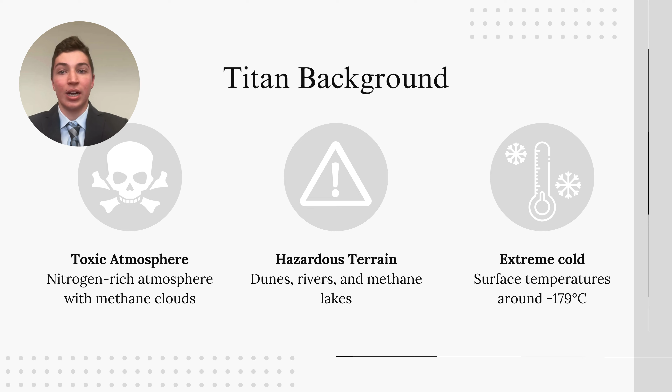We selected Titan because it is one of few celestial bodies in the solar system that has a dense enough atmosphere for an airship to fly. Titan is also a very interesting moon to explore, as even despite its toxic nitrogenous atmosphere, methane clouds, rivers, and lakes, and its extreme cold, there is still potential for life forms that use methane as a liquid solvent instead of water. Life as we know it couldn't exist, but if we were to discover life, it would revolutionize the fields of biology and astronomy, showing the potential for different life forms from all across the solar system and galaxy.

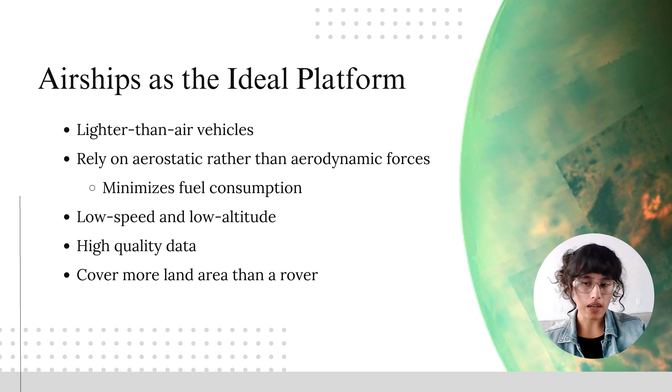As lighter than air vehicles, airships are the ideal platform for a long-term mission to Titan. They rely on aerostatic rather than aerodynamic forces, which minimizes fuel consumption. Additionally, airships offer a unique combination of low-speed, low-altitude flight, endurance, and maneuverability. Finally, airships are able to capture high-quality data while covering a large land area, enabling analysis of Titan's hydrologic cycle, methane sources, and possible origins.

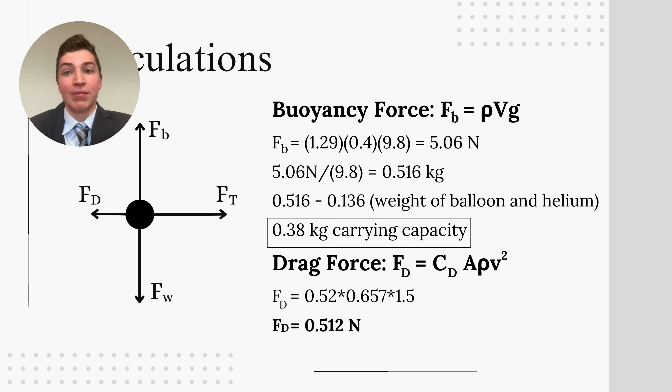Before constructing the airship, we calculated some of the forces that would be acting on it. We found that considering the weight of the balloon, the airship would have a carrying capacity of around 0.38 kilograms, assuming a perfectly spherical balloon. We also calculated the estimated drag, finding that there would be about half a newton of force opposing the thrust from our motors.

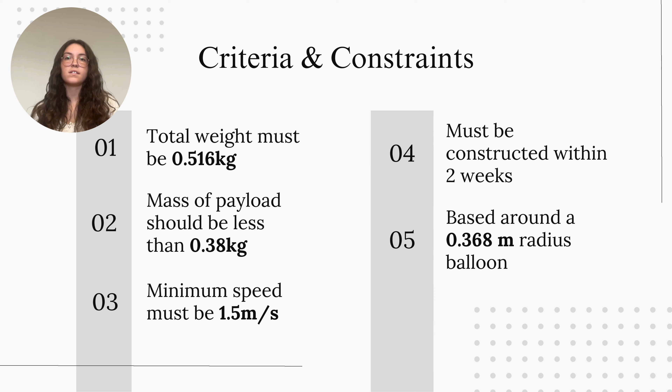Using the calculations from the previous slide, we determined that the total weight of our design had to be 0.516 kilograms, with the payload mass being less than 0.38 kilograms, and the minimum speed had to be 1.5 meters per second. The guidelines from our mentor and the program gave us 2 weeks to construct the design using a 0.368 meter radius balloon.

With the criteria and constraints in mind, we moved into the sketching phase, where each team member sketched their own design for the airship. Some of the aspects we focused on were the shape of the gondola, the number of propellers, the propeller positions, and the method used to attach the gondola to the balloon. We then came together to compare designs and narrowed it down to 4 options.

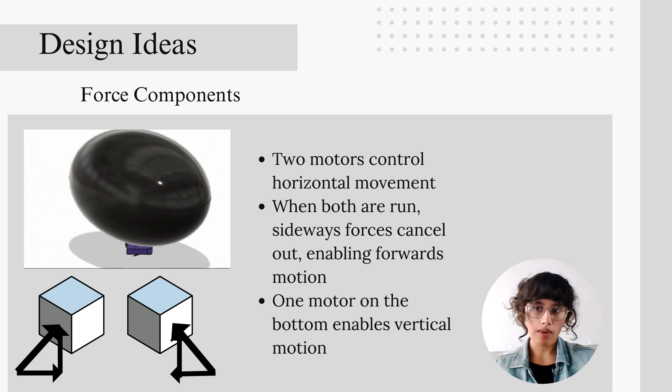Our first design idea relies on force components. Two motors enable horizontal movement. When both are run, sideways forces cancel, enabling forwards motion. To turn, only one motor needs to be run. An additional motor on the bottom of the airship enables vertical motion.

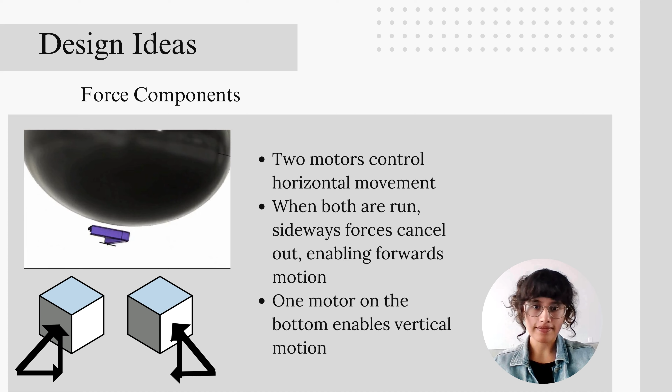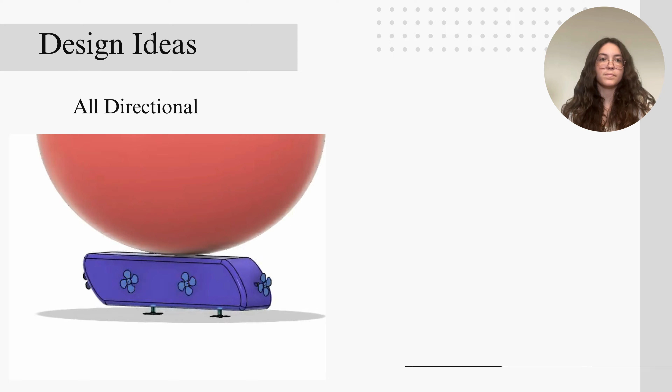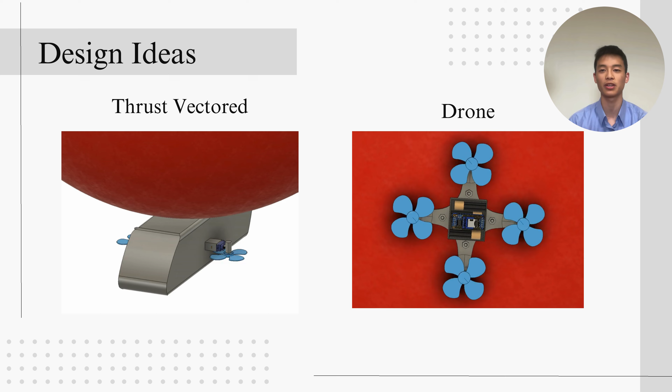Our final idea utilizes thrust vectoring. This is the most traditional approach to a gondola design out of the 4. 2 DC motors, each rotated by a positional servo, angle up and down and sideways to provide thrust. This approach would be the most simplistic because it is following traditional designs of a normal gondola.

To decide which designs we should pursue, we created a decision matrix. Each design was graded based on a set of criteria, with the lower numbers as worst and the higher numbers as best. As you can see here, for attachment mechanisms, we decided on using a net instead of a rigid exoskeleton to attach our gondola to the balloon. This was largely because of the ease of doing so.

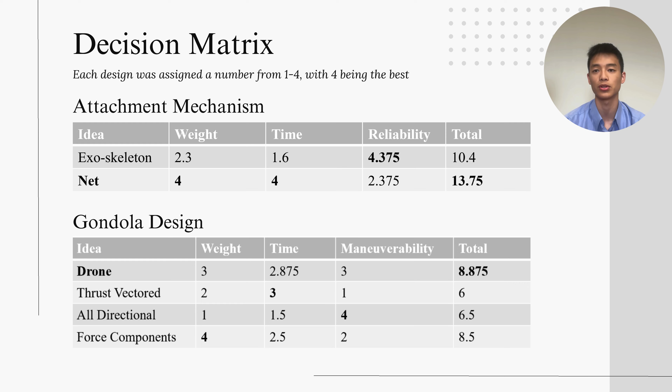For our gondola, we settled on the drone design as it was the most well-rounded and performed the best overall. Ultimately, we settled on our final design of a drone maneuvered by 4 DC motors, with the electronics placed in the center. The drone is 19 centimeters across and weighs about 29 grams once 3D printed.

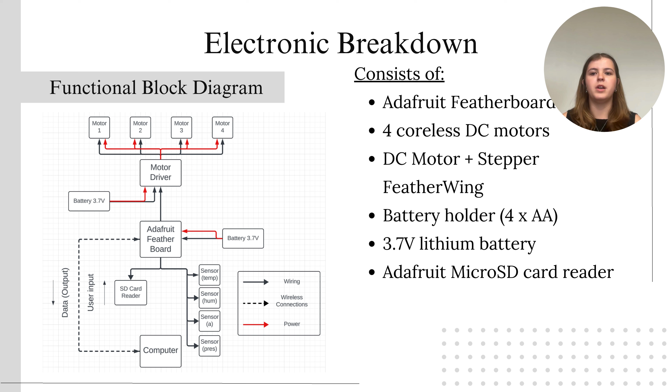For the electronic components, we chose to program an Adafruit featherboard and integrated a motor driver to control 4 DC motors. The motors were powered by 4 AA batteries, while a 3.7-volt lithium battery provided power to the featherboard itself. Attached to the featherboard was an SD card reader responsible for recording data from its onboard sensors, which included temperature, humidity, acceleration, and pressure to monitor environmental conditions. The featherboard operated wirelessly, enabling autonomous flight capabilities.

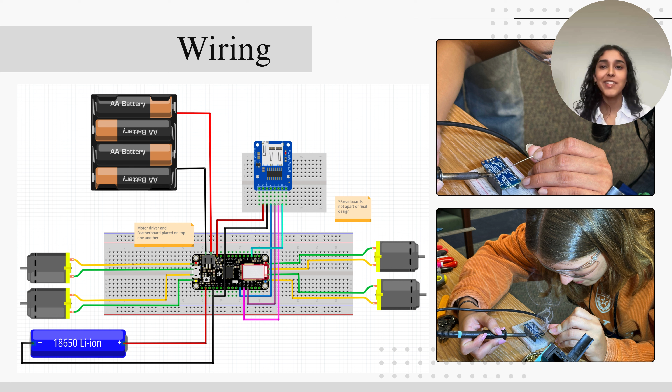Using the previously shown diagram, we modeled the optimal placement of our electronics using Fritzing. To conserve space and minimize weight in our final model, we positioned our motor driver above the featherboard, thus eliminating the need for a breadboard. Here on the right, you can see Barbara and myself soldering the header pins to the featherboard to secure it into the driver during the testing process.

In terms of programming, we utilized an Adafruit featherboard that is equipped with a USB connector, charging port, and several different sensors. With the charging port, we were able to fly our airship wirelessly while using a battery, and with the USB connector, we were able to plug the board into a laptop and run code files from the CircuitPy drive we created.

We ran and coded our programs in the CircuitPython environment called Mu, and from there, we were able to test the functions of our code, such as spinning the motors, through the Bluefruit Connect app that contained a control pad, all of which was compatible with both our featherboard and CircuitPy.

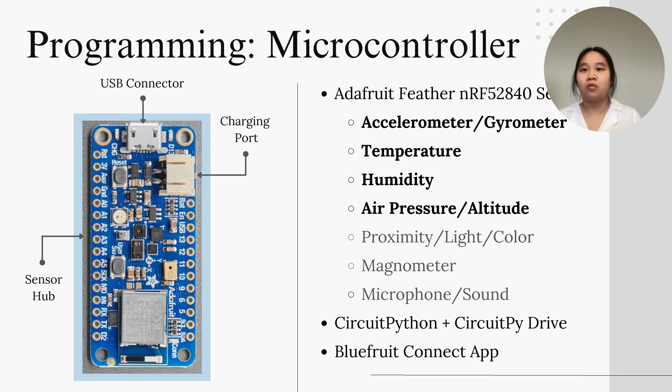At first, we had some technical challenges connecting the board to our laptop and getting some of our programs to execute. But after we were able to troubleshoot those issues, we were able to implement several features on our airship, including movement and sensors. These sensors include an accelerometer, a gyro which measures angular velocity, temperature, humidity, air pressure, altitude, proximity, sound, and more. As we tested our build in the air, all the different sensors collected data and stored it within a file on the SD card, which will be discussed in depth later.

After setting up the microcontroller, our main focus was coding the motors, done by utilizing CircuitPython and its MotorKit library. We were able to maneuver the airship vertically by switching the directions of the motors, which changed the airflow, causing the ship to push either up or down.

However, our biggest challenge was changing the direction of the ship without causing it to drift upward as well, and integrating these quadcopter flight dynamics into a neutrally buoyant airship, a concept we couldn't find much past research on. After some experimentation, we accomplished this by referencing drone dynamics, running two adjacent motors at a high speed and running the other two at a low speed, causing the ship to move in the direction of the slower motors.

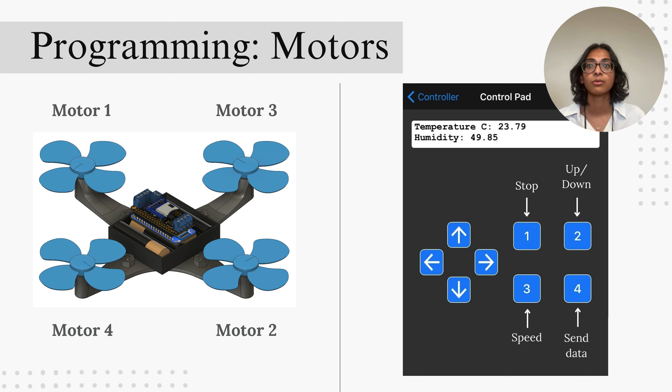Using the Bluefruit Connect app, we added a user interface to allow the ship to be maneuvered through a control pad. As you can see, the control pad included 4 directions: front, back, left, and right, and some additional controls such as stop, up and down, and 4 incremental settings for speed. One of the most important parts of the user interface is the 4th button, which allowed us to program when we wish to collect and store data.

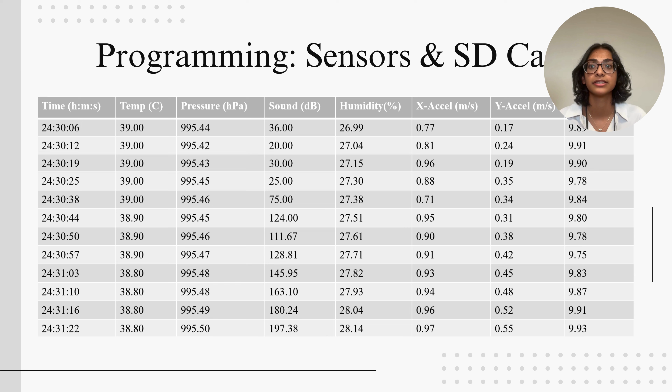By clicking the button, a stream of data is stored to an SD card, including readings for temperature, pressure, sound, humidity, and acceleration, which can be later downloaded and analyzed. This was another one of the biggest challenges we faced throughout the project, determining an efficient way to collect data. After attempting to use an MQTT protocol, we eventually settled on the SD card due to its simplicity and efficiency.

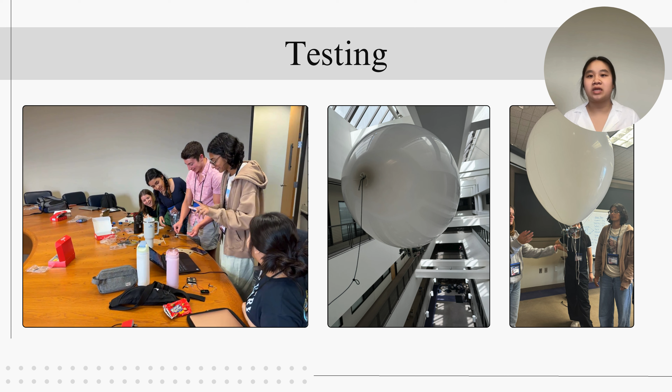We tried the net at first, but then decided against it, as it added too much mass to the airship, making it too heavy to be neutrally buoyant. We decided to use masking tape and Velcro to secure the build to the balloon. In our most recent prototype, shown in the third image, we oriented the balloon the way it normally is and found success securing the drone at the bottom with a string tied around the balloon. After deciding that design was best, we added small increments of mass to make the airship neutrally buoyant, which allowed us to continue testing and controlling its movement with the motors.

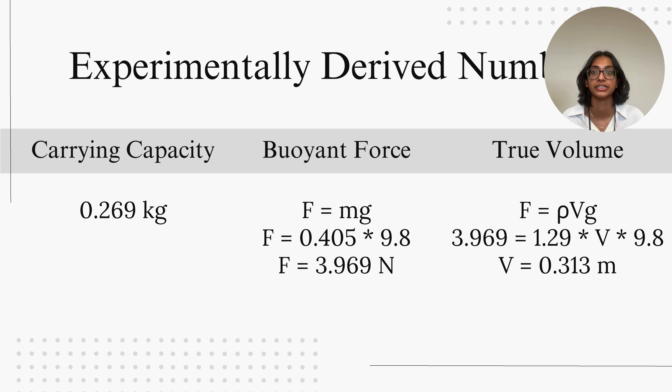Although we performed rough calculations prior to the build, we recalculated many of these numbers after initial testing. Due to the balloon's diameter being smaller than expected and its ellipsoid shape, the true calculations came out much smaller than expected. Our final carrying capacity ended up being roughly 0.269 kg, significantly less than our estimated 0.38 kg.

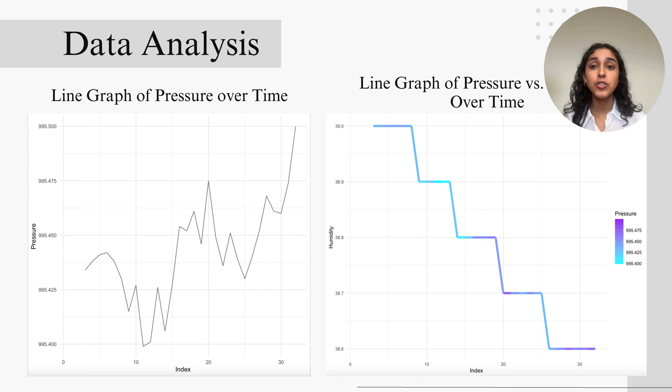Measurements made by the accelerometer show the airship's directional acceleration in 3D space. This data is useful to show where the airship is going, as well as to calculate wind speeds on Titan. We also collected data on surrounding pressure and humidity over time and converted that to line graphs. Understanding these atmospheric conditions helps us understand the airship's flight for stable operation, and for landing on Titan, this data is crucial to navigate its dense atmosphere and ensure a safe descent.

Throughout this project, our team had to handle many challenges. First, our initial calculations for lift force and terminal velocity weren't accurate because of the assumptions and estimations we made, which made it harder to make the airship neutrally buoyant. Second, the balloons were difficult to work with because they were delicate and would deflate by the end of each day. Finally, we had limited time since we only had two weeks in person, and resources such as helium and 3D printed items were limited.

If given unlimited time and materials, there are improvements we would make to our design. We would include additional sensors and capabilities such as a camera, mapping capabilities, or a UV sensor. We would use precise measurements and calculations so we could know exactly what constraints we were working with. And if this were an actual mission to Titan, we would include a shield to protect the electronics from Titan's harsh conditions, and deploy multiple airships for fault tolerance and increased data collection.

On behalf of the team, NASA SEES has been incredibly impactful in not only providing the opportunity to engage in high-level research, but also teaching the importance of perseverance. This experience has deepened my curiosity for science, and the trips along the way significantly improved the team's collaboration and created a positive environment which reflects on the quality and outcome of our work today. We give our deepest thanks to not only our mentors, but everyone behind the scenes who made this program possible.

Previously, I wanted to major in mechanical engineering, but this program allowed me to explore a new career path, and I now plan to major in aerospace engineering.